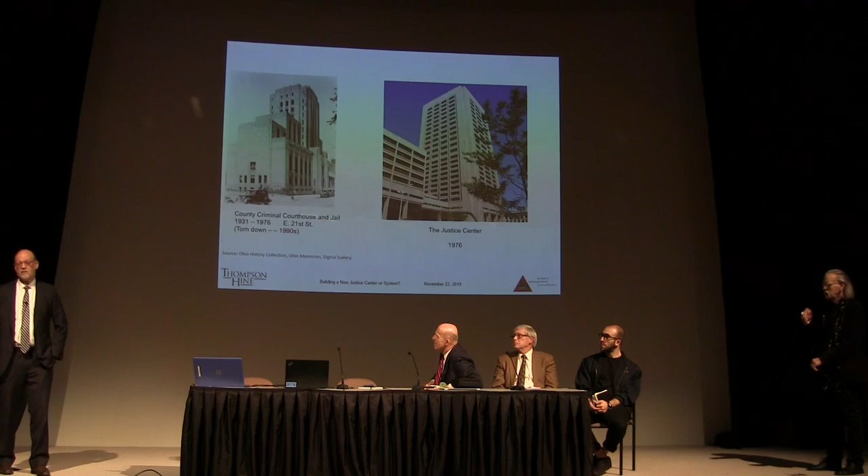But what happened over on the left was in 1931, the county criminal courthouse and jail was erected. That actually served until 1976, when the new Justice Center, or now the old new Justice Center, came into being. That was actually torn down in the 1990s. It was out there for quite a while on East 21st Street. If you look at the building, it's kind of a classic Art Deco building, resembling in some ways the Justice Center with the tower and what's to the left of it. But the Justice Center was completed in 1976.

Now, the Justice Center, just a little bit of information about it. It's 25 stories high, 420 feet. It has 44 courtrooms and 9 hearing rooms shared by the Common Pleas Court and the Cleveland Municipal Court, and has the Police Administration Building attached to it. And obviously, in back of it, when it was first erected, Jail 1. Jail 1, depending on how and when you looked at it, accommodated approximately 956 beds.

Now, this is kind of interesting. If you go back to the history of this, in 1972, the budget was $62 million. It was completed in 1976 for $179 million. I've been asked if I manage this project not to do that again. But I will tell you that there's some justification for a little of that. The scope did change when the city and county got involved. There were some additions, the police administration building and some other things. But there were also very difficult issues with procurement that led to a lot of criticism, a lot of cost overruns.

It is interesting because at or about the same time, the Sears Tower was completed. Actually, two and a half years before that, the Sears Tower was also completed for $179 million. The Sears Tower is three times taller, and its volume is over 4 million square feet compared to under 2 million square feet for this. It was also sold three years ago for $1.3 billion. If we could find someone to buy the Justice Center for $1.3 billion, I would have many solutions for us.

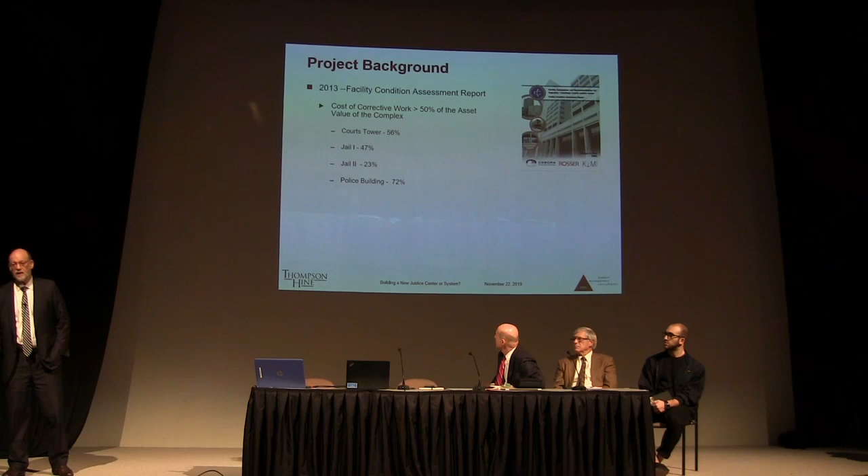2014 did a planning report just talking about how we would go about renovating it and what we would do. And basically what it showed was, depending on what you did, just to fix the buildings without changing anything programmatically would be between $300 million and $428 million.

To say it a different way, if this building had been maintained from day one, if the roof system, the wall system, the mechanical systems, if everything had been updated and maintained properly, that expenditure would not have been required, because everything would have been in real time brought up to speed. So that's just a cost, not to actually do anything programmatically to make the buildings better, just to make them work. At that time, a cost of a new building was unknown because that was not part of the exploration.

Now, one more thing I will tell you. The planning report also said that if you think about what to do in the future, there was some planning, and it said, what would we have to plan for if we actually built new facilities? And this was an assumption. It was really interesting in the 2014 report.

It said, look on the right-hand side, because at that point in time, our jail population had steadily gone up. Keep in mind, and this is something our team has uncovered, in the last 10 years, the population of Cuyahoga County, as we know, has gone down. We hope it's stabilized, but over the last 10 or 15 years, it's gone down. The crime rate has gone down.

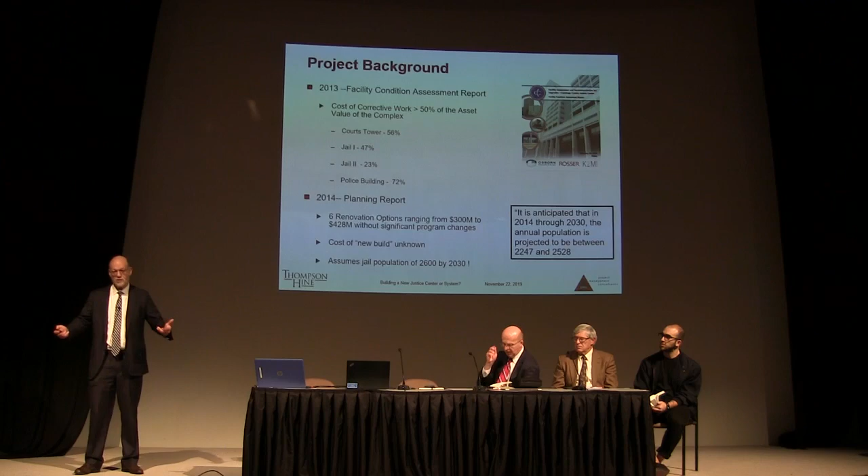Now, you've read a lot about the issues and what's going on with that, and we still are detaining someplace in the county about 1,900, it varies. It's a little down on the holidays. We put them in different places now, not necessarily in jail 1 or jail 2, but we have to accommodate all of them. So in any event, that was the assumption, that we would have to have a jail that housed 2,600 people based on the trends and based on that planning.

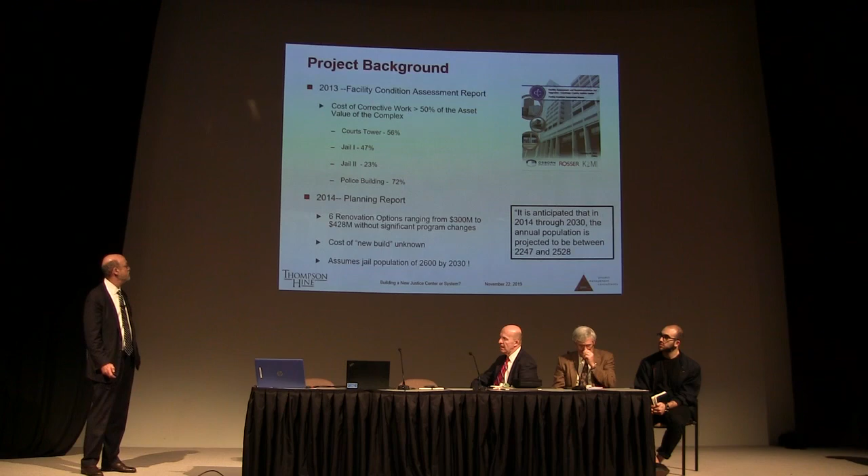Now, I'll mention one more thing. Every year something wasn't done, the cost of what you would eventually do increases. The construction cost, renovation cost, generally is about double the CPI. It leads inflation. It's a leading indicator, unfortunately.

Right now, we are not quite as hot, but there are very hot markets all around us. Building in Columbus right now, very high costs. In this industry, in the justice industry, we have some very high costs.

Hollow metal, for example, there are very few providers, very high cost. Our estimate, and what has been happening, is that really these costs are going up by about 6% a year.

Let's just take that cost of what it would take to fix things, and let's use the number of $500 million because it's easy to calculate. If the cost goes up 6% a year, every year you wait to do something, it's going up $30 million.

That's not the biggest cost that's going up. We're going to show you the biggest cost that's going up because of inaction in a few minutes. So in any event, now I'm skipping a whole lot of stuff.

I'm not going to talk to you about all the issues about what happened since that study. As you may know, what happened ultimately is a steering committee was formed. There are 12 people that make decisions on this committee. It has been meeting. They must make decisions by a 10 of 12 vote. They're all public officials with a fiduciary responsibility as to what occurs.

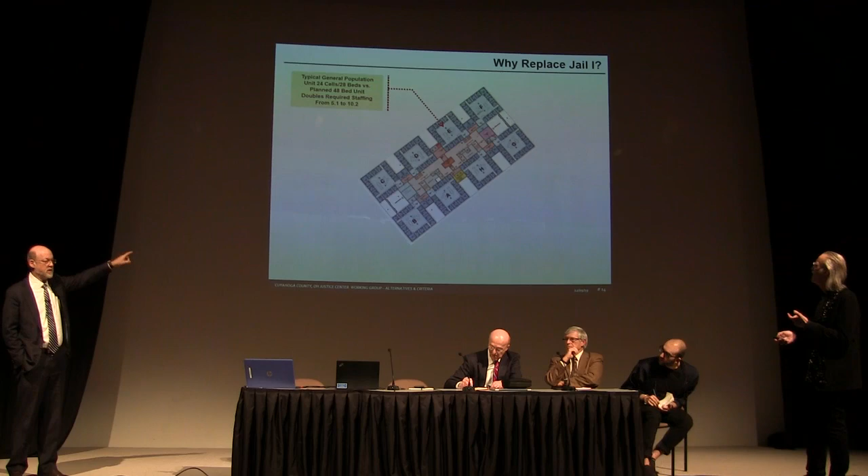Jail 1 was designed with housing units of about 24 cells, so 24 offenders per unit. It can't be double celled because of the cell sizes and other standards. There have been a couple of program rooms—a counseling room, an interview room, and a classroom—that have been converted to multi-bed rooms, so now there's about 26 to 28 offenders in each unit. Under Ohio standards, general population units can be as large as 48 beds.

So what we're operating in already, and will continue to operate in, is what's called direct supervision. We have a staff member in the housing unit dealing with that population 24 hours a day, 7 days a week. Each one of these housing units requires 5.1 staff just to operate the housing 24/7—that's three shifts, 7 days a week, with vacation, with relief, with weekends. That's what the equation ends up being. And keep in mind, if you look at the building from the outside, that's what you're seeing—that's the structure. That can't be changed; that's the way the building is built.

So effectively, 2 of these units could be staffed by the same 5 people. So effectively, this floor plate doubles the housing staffing of what it could be.

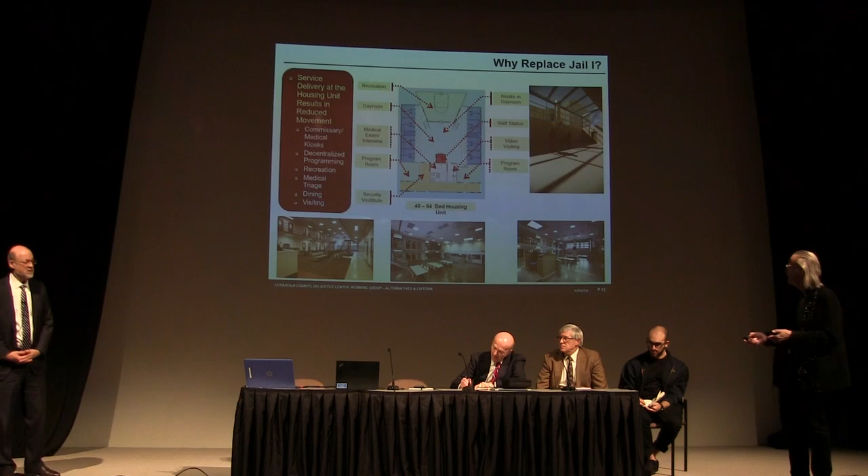So keep in mind, just to emphasize this—whenever you move someone, someone still has to stay there to supervise the housing unit. So now we have someone going with whoever they have to go with. They're traveling all over. You have that going on.

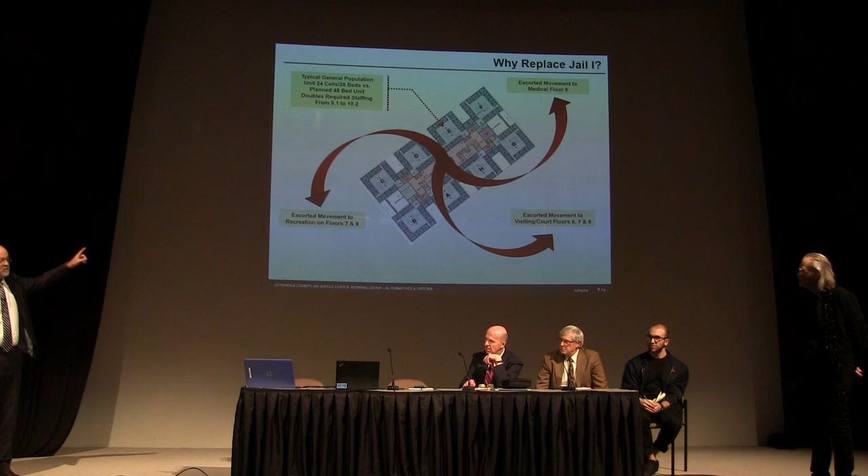And by the way, we call it direct supervision, but if you've ever actually looked in those housing units, it's not direct supervision of the personnel, it's direct supervision of doors. You really can't see very well much of what's going on, and the space is very poor space.

We're going to show you now what a modern, efficient jail looks like with much better housing.

Before we get to that, all this ends up talking about operational savings, but the bigger issue here is one of human capital and access to programs, access to outdoors, feeling the sun on your body. And it's not just the human capital of the offender—staff live here 8 hours a day, and they serve a life sentence.

Remember, most folks in the county jail are there maybe a year or so, or a few months. Maybe there's some cases that run longer, but it's a relatively short duration, whereas the staff serve a life sentence, 8 hours a day. And it does affect wellness, it does affect your outlook, it does affect how well you can do your job, which also affects safety and security—as does seeing movement.

So this is what the program's based on. This would be a 48-bed housing unit, but in that house, every housing unit has a recreation area.

And effectively, rather than moving people and saying you get recreation from 10 o'clock to 11 o'clock, with behaviors—well, I simply unlock that door and now the offenders have a choice of being in a day room, their cell, or outdoors. It helps reduce the apparent density and the people getting in each other's face.

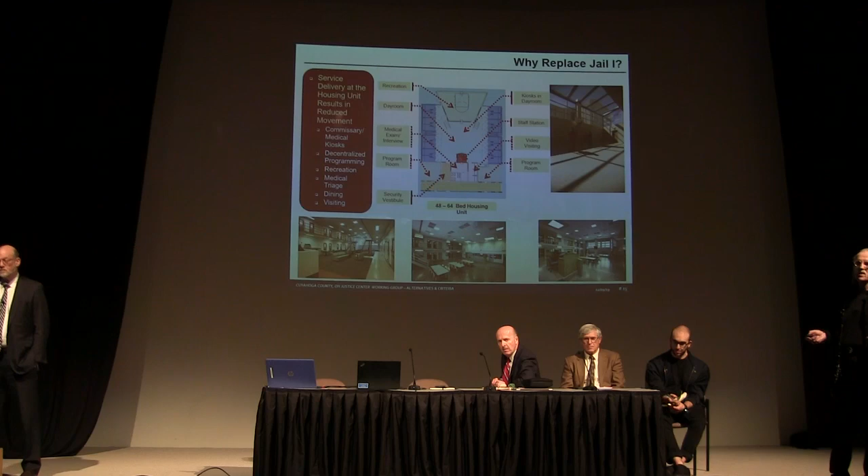Every housing unit would have a small medical exam room. So rather than move everybody for sick call—and quite frankly, when you do sick call centrally, everybody wants to go because they get to get out of their housing unit for an hour.

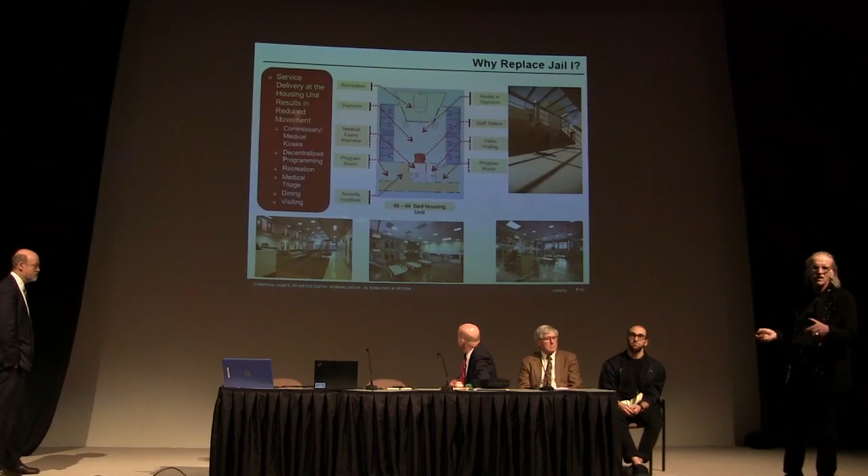The nurse would now come here for initial sick call, and if it's simply an aspirin or something that can be taken care of, it would be handled there without moving the offender. If it's something requiring more treatment, they would then be moved to central medical.

It comes with program rooms so that we can deliver programs right at the housing unit. And it comes with a video visiting area, which includes both general video visiting as well as a private room that can be connected into by the public defender or by the bar. Typically that's put on a separate system so that there's no recording of it.

So basically we really only move somebody if they need serious medical treatment. We also have medical and mental health beds programmed in. So if it's a serious case, they're not going to be in a general population housing unit. They're really only moved if they're going to go to court or they're going to be released.

Everything else is delivered, which means the one staff member I've assigned to this housing each shift is really responsible for the whole range of activities.

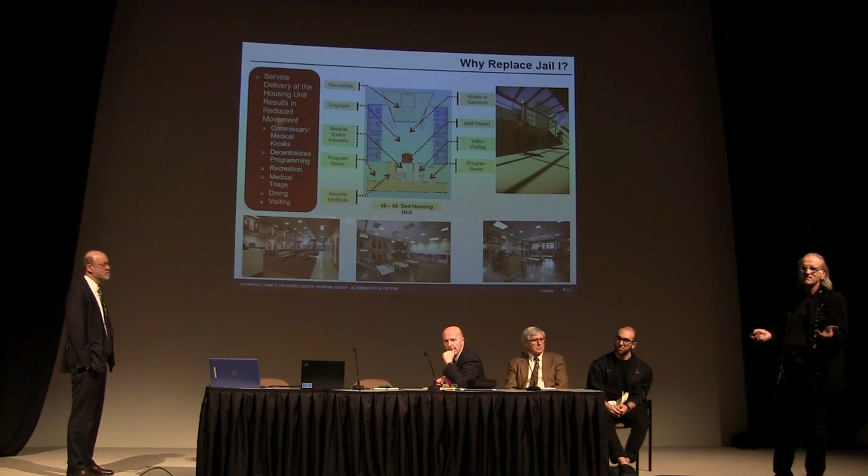And again, you can get an idea of the quality of environment, the access to an outdoor area. You can get more recreation, get more physical activity. Probably the worst thing in jails that affects behavior, that affects incidents, and unfortunately affects suicides, is lack of anything to do—just sitting there day after day after day.

So we took a quick look at what that meant. Right now, Jail 1 and Jail 2 have 66 housing units in total, just general population and special. The program calls for 41. And so this is just housing staff. This doesn't include the movement staff or separate staff for recreation or for visiting if you do in fact get to see your client.

Just at face value of the program, based on housing only, which is a pretty straightforward equation, it saves 127.5 positions in the day-to-day operation of the jail. I didn't know what to do exactly with this because we have done calculations and haven't yet released all of this information. But I will tell you in some form exactly what these savings are, just not on this slide.

Go on, it's significant. Now, the other thing in both of these jails, when they were built, direct supervision was new, something people were adopting. In most cases, people put in a floor control room to back up the staff assigned to the housing unit. We don't do that anymore because it's been proven to work on an interpersonal relationship basis. Correctional officers would have body alarms in case of an emergency. I've actually been in jails when a body alarm gets pushed, and it's amazing the response you get from the team coming to the officer's aid. So the outer door of housing would be controlled by main control.

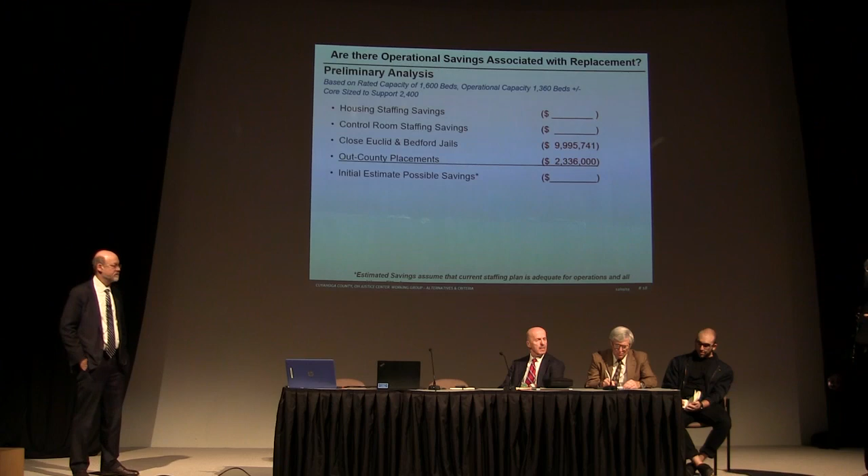And that's just through operation cost. And you follow through with the population management initiatives. Because it still means you drive that population down to that 1,600 number, which we think should not even be a challenge. Now, it should be done.

So let me just show you something else. Cost of a new jail of the type we're talking about - and we'll tell you more about what that would be like, an efficient jail - somewhere in the vicinity of $300 to $400 million. High number, but that's what it costs to do this properly, exclusive of land cost. You can make some assumptions as to what you would have to do to pay for that.

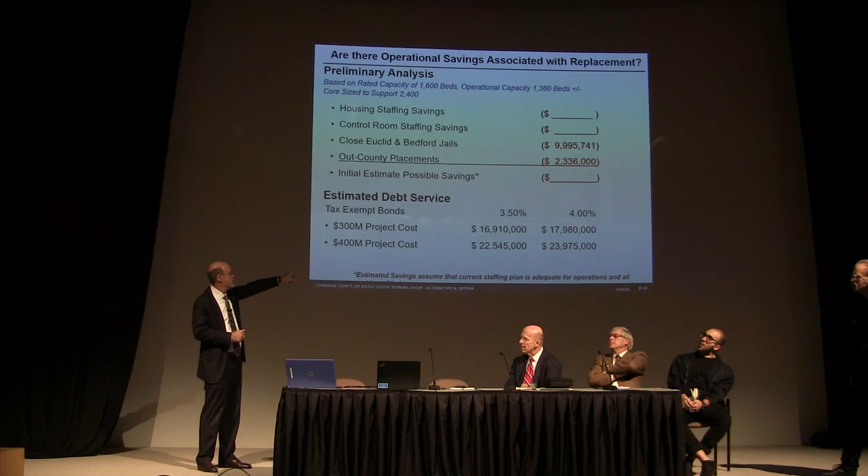AA tax-exempt bonds—I've just done an example here. Right now, interest rates are somewhere between 3.5% and 4% if you issued them. Including issuance cost, the debt service would be somewhere from $17 million at 3.5% to $24 million at 4% on $400 million. So the range would be $17 million to $24 million, with the higher interest rate matching the higher project cost. That's not even counting the savings we're talking about from efficiency—$27 million a year would be realized.

It would easily pay for the actual cost of that facility, particularly over 30 years. If you were 2 or 3 million ahead a year over 30 years, you'd actually have money left over for other things. The idea of what you could gain by having an efficient, proper jail without all this unnecessary and counterproductive movement is pretty extraordinary. Effectively, the savings in the jail would pay for over 50% of the cost of the entire project: courts, office space, and jail.

So that's kind of the background on that. We validated this with rules of thumb and other larger facilities that have staffing plans. We think the savings is realistic. Obviously, this was one of the questions we got from county council and the county executive as we prepared to look at alternatives, to make sure it was doable.

Some of the other common elements: the sheriff's admin would go with the jail. Everything that's off-site now would be consolidated as part of the courthouse complex—public defender's offices, probation offices, other things that are in other space. There's a lot of stuff in Courthouse Square that would come back to the site. Parking is included in the analysis so that we don't have people parking down by the river and walking up the bank to work at the courthouse. No matter what the site or the plan, we incorporate a parking component.

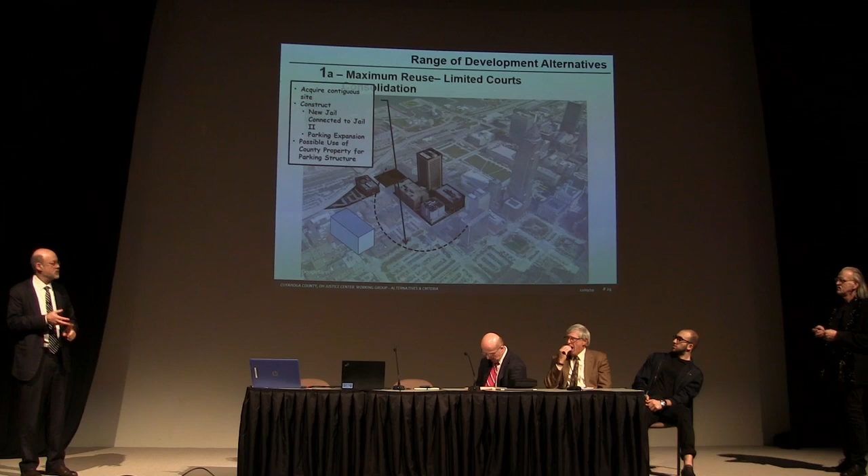The volume of whatever you put there—that box represents the volume. So that box, in some configuration, has to fit next to jail 2 in order to do this, because it's just impossible to use jail 1. So if we want to keep the jail on the site, you have two options. One is to put that box somewhere.

Since jail 1 is the piece that will be replaced in any option, it's obviously the first piece to be built because we get it out of the way.

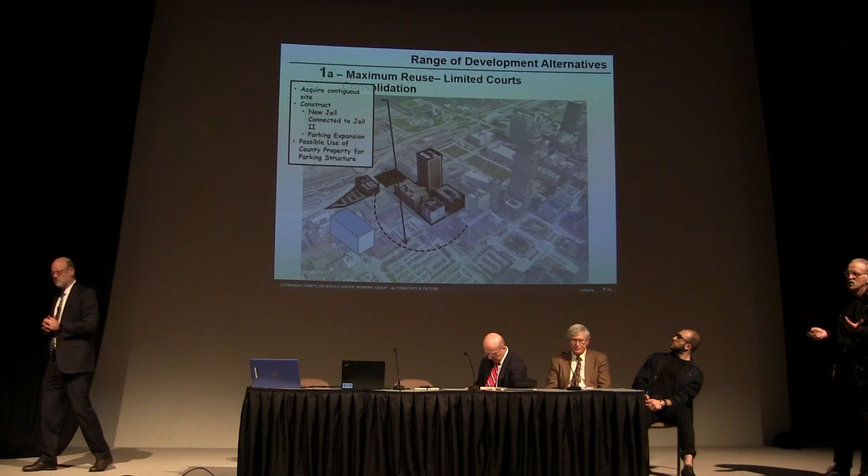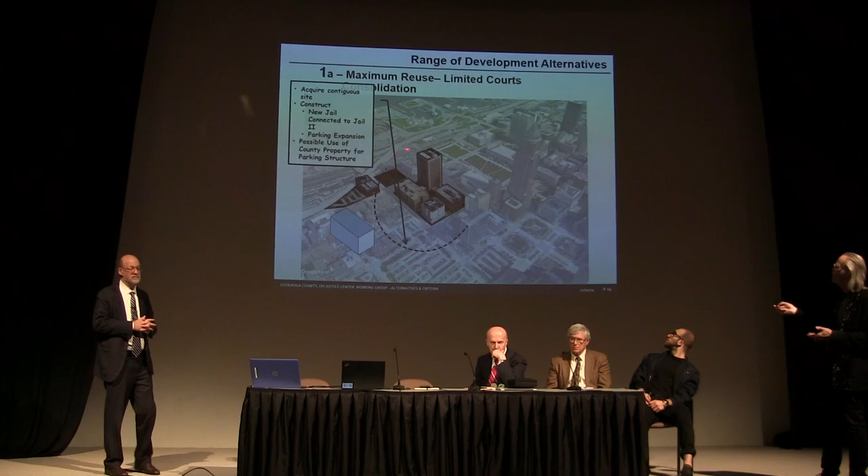The reason the park and the courthouse square site is shown is we'd either have to acquire additional land for parking, or potentially under the park do what we've done behind the old courthouse with underground parking, because we're trying to make sure every scheme has some kind of a solution for parking long term.

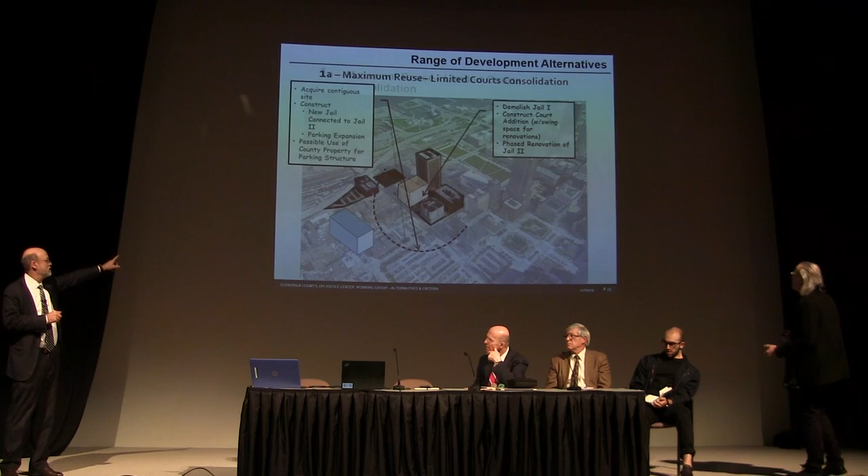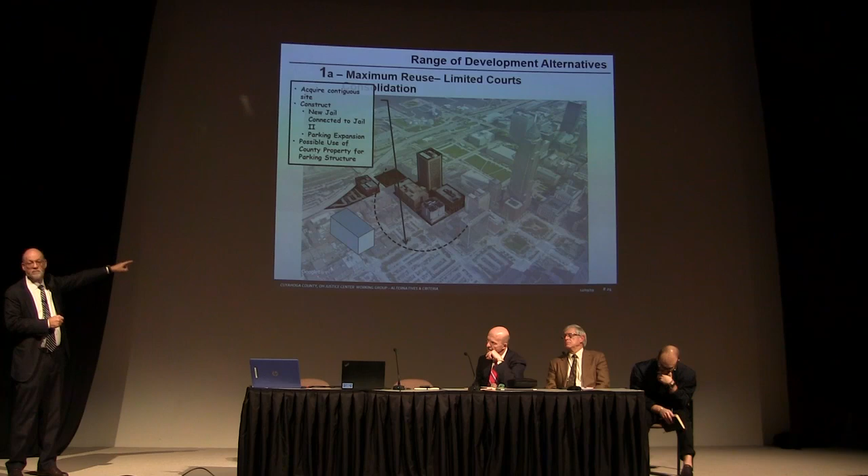Now let me make another couple statements about this box. Jails are extremely heavy buildings, as you can imagine, with the concrete, the steel, et cetera. Any box like this that you put on this site, because it's an urban site with not a lot of space, it's going to be a vertical jail, many stories tall. That means the following things.

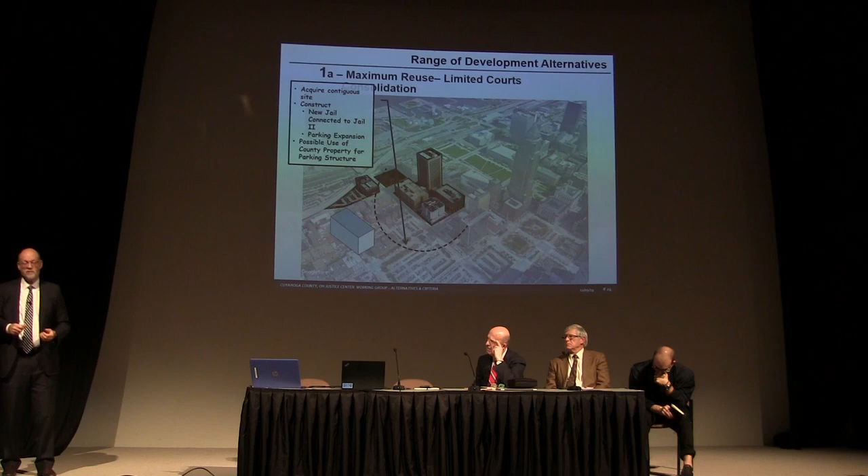Number one, from a construction point of view, it's got to be on deep caissons. We have glacial till downtown, and we have 200 feet to bedrock. It's very expensive construction to put in caissons and put a jail on that kind of building. So any vertical jail is going to be 15 to 20% more expensive than a horizontal jail that might go somewhere else. That's point number one. This also has elevators.

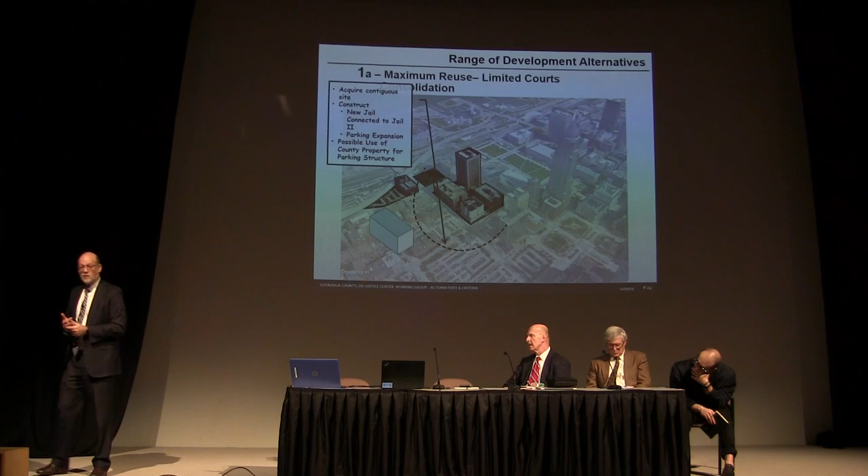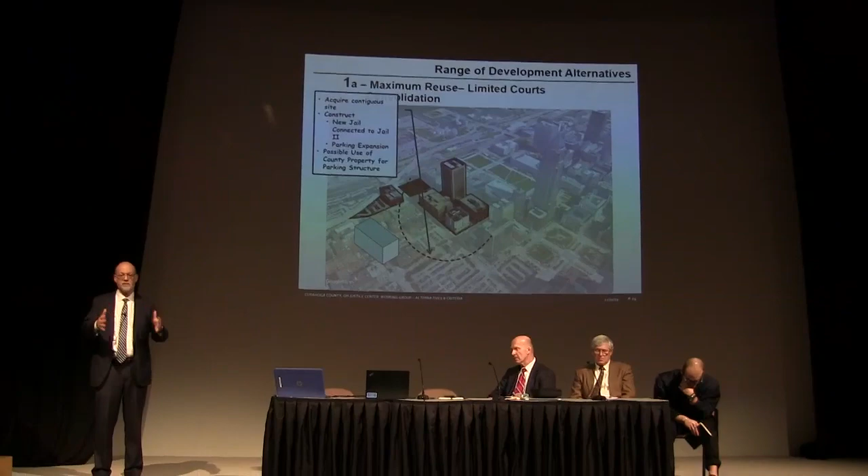The other thing you will hear if you talk to the warden, the sheriff, or the director, is that they are not fans of vertical jails because they don't like the vertical movement. They don't like the elevators. They think there's safety, security, and other issues. Obviously, the kind of jail housing unit we're talking about, which would have recreation with each unit, you can still do it, but it's challenging to do a vertical jail.

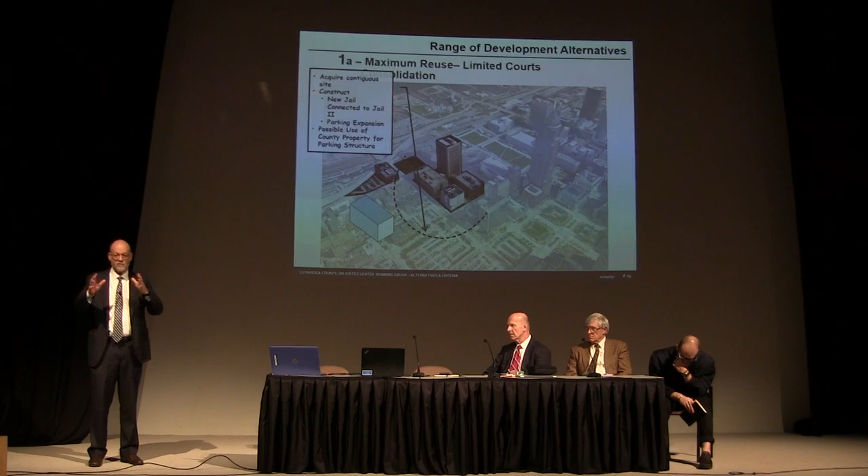The most important thing to think about here is what we talked about when you see another alternative, which is a campus jail. It has a central unit, and then you can put housing units around it, and you can have as many or as few as you want. So you could start out with less, and if you found you needed more, you could expand.

The issue with a vertical jail is you build it one time, and you build it for the maximum of what you think it has to hold. So unlike building a central core that could have 2,400 but only build out for the 1,600 housing units you want, for this kind of building you have to build a core and shell capable of holding all 2,400, even if you never use it, because otherwise if you ever did need the expansion, you'd have no place to expand. By the way, if you don't use that space, there's no adaptive reuse for a jail. It's simply wasted.

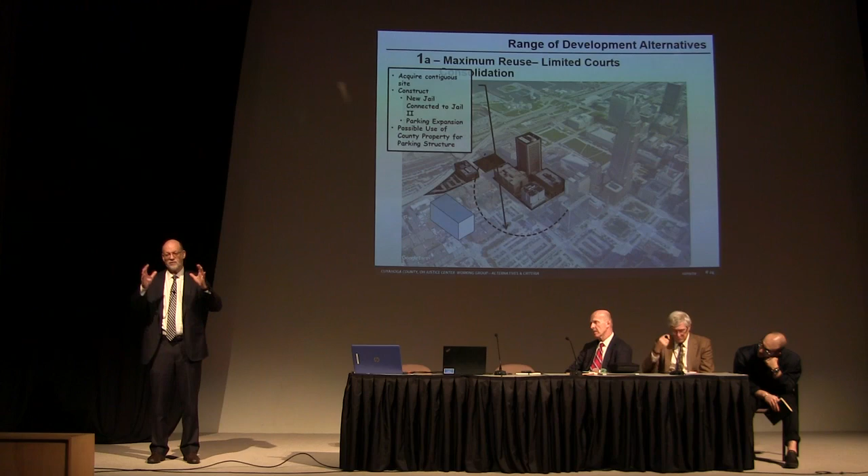As we talk about this, we'll be throwing out some of those things, but once alternatives are selected, every one of those issues will be quantified for comparison for the 3 to 5 alternatives we narrow it down to.

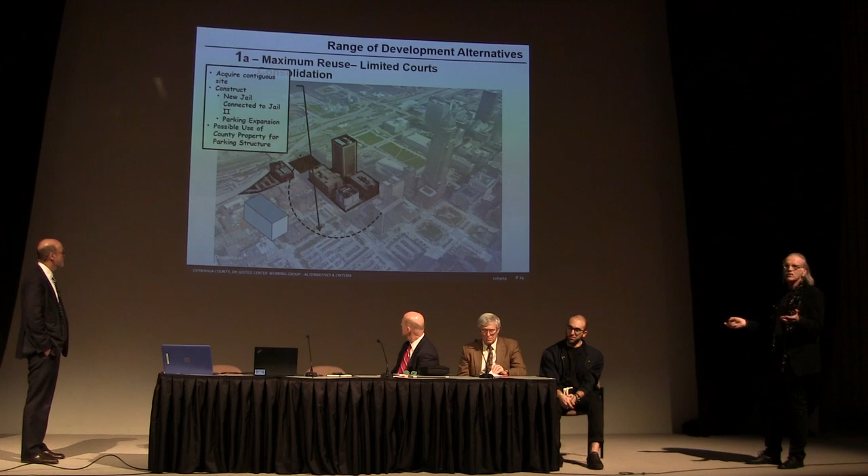A related issue, in terms of starting this project, is that the jail takes 4 to 5 years before we touch anything else, until we build the jail and demolish jail 1.

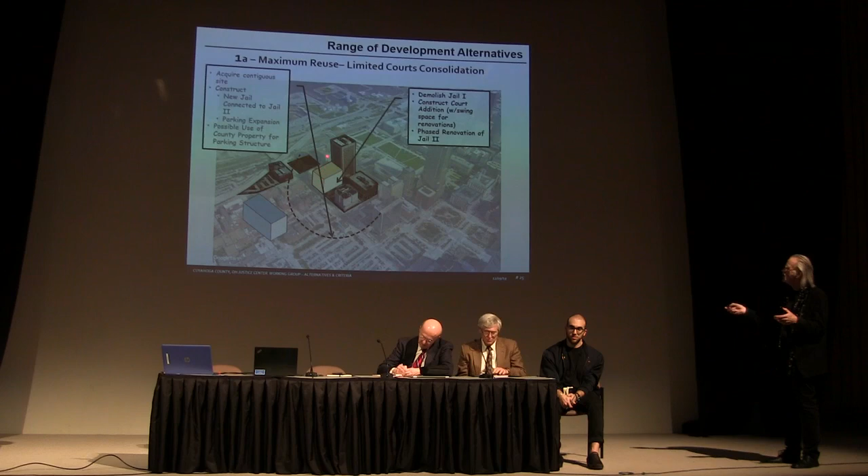After we demolish jail 1, we would construct our courts addition for the shortfall in space we talked about. But in this case, the shortfall goes down a bit because domestic relations would stay in the old courthouse. This was, again, about using everything we've got.

Then the final phases would be renovation of all the existing buildings once we had some swing space to move people around. And again, we would not have enough swing space to fully vacate the courts tower, so that renovation would have to be done 2 to 3 or 4 floors at a time as we go through it.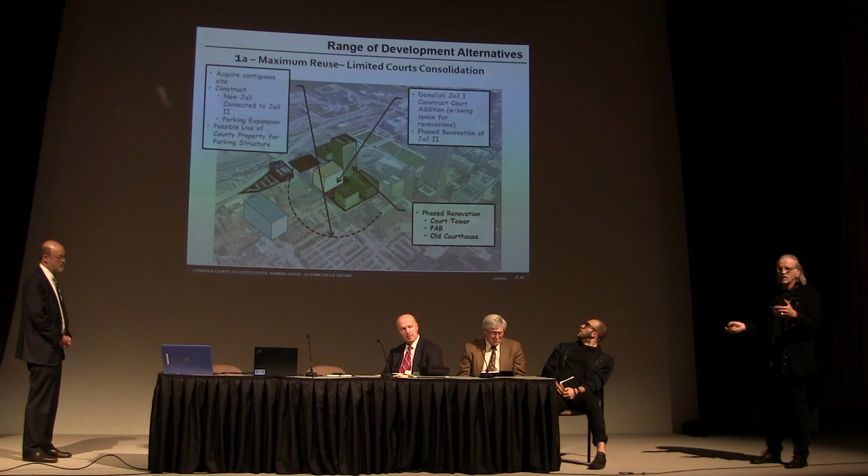I think it's important, when we look at that courthouse and where we are today in terms of how you all practice versus where they were when they built that courthouse, to recognize we'd basically be doing a major renovation of everything in that courthouse functionally.

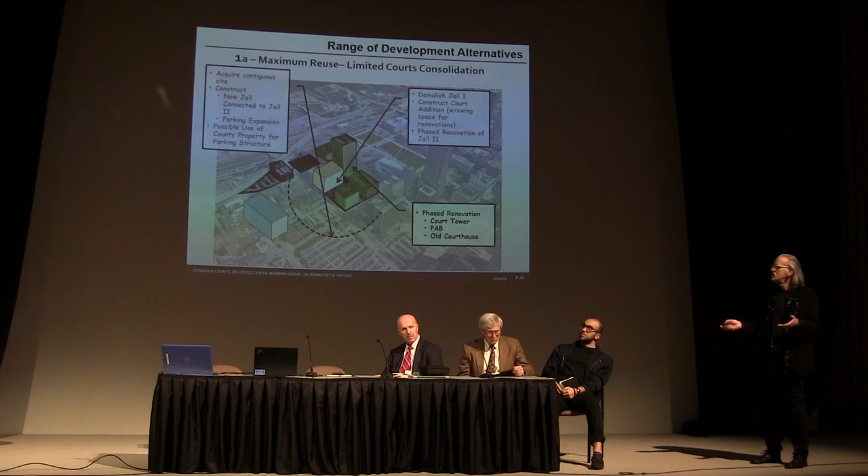So we do have advantages and disadvantages, and this will be on the website. Jeff's talked on some of these. Obviously, we gain the advantage of getting out of Jail 1 and getting operational savings from it. We maintain a consolidated justice center on the existing site, which has been a concern.

But there's a wide range of major disadvantages, and probably a couple of the biggest are programmatic compromises, because whatever we would do with the courtrooms is based upon the module we have in the tower, and domestic relations staying in the historic courthouse. We also believe...

We're going to speed this up. Andy, we have more of a time restriction than I thought. We're going to have to zoom through the rest of this and get to the polling, so we're going to go really fast through these.

All the on-site units probably have the highest comparative cost and the longest time to complete occupancy of the project.

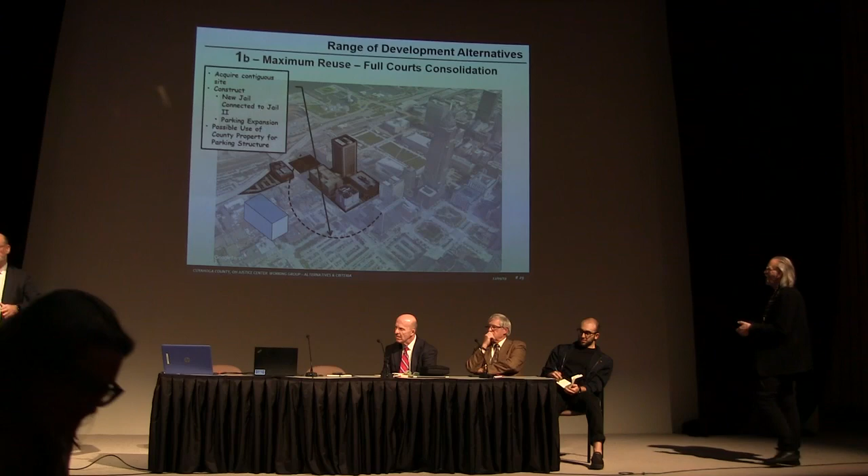So keep in mind, if you do this, once again, you can't do anything until you build the new Jail 1, then you get rid of the old Jail 1, and then at that point in time, you can renovate or put your next unit there.

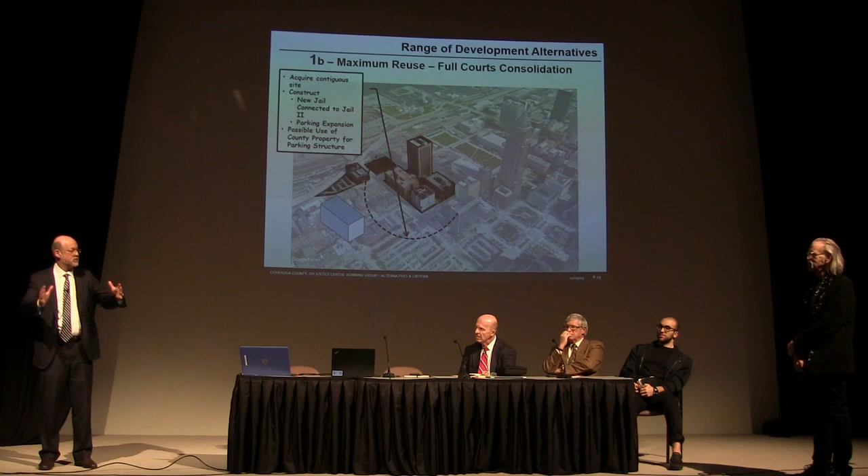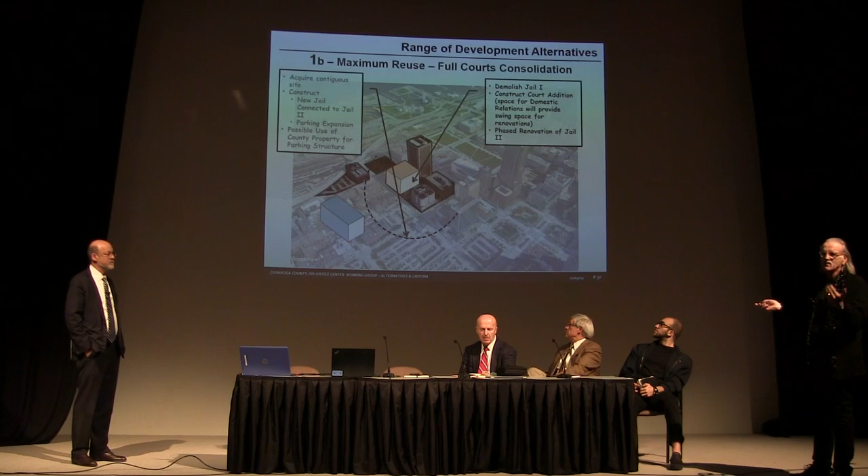So the second option is very similar. The biggest difference is the addition's large enough to allow us to bring domestic relations on site, which gets out of the safety and security issues we have, but many of the other advantages and disadvantages are the same.

These are the highest cost options because number one, the vertical jail is the highest cost option for a jail. Number two, renovation is more expensive than building new, and it takes so long because you can't start the courthouse until you get done with the jails.

If the jail takes 4 to 5 years, you don't even start the courthouse or whatever you're going to do until you're 5 years out, and it extends the whole project maybe 8 to 10 years. The longer the duration of the project, the more expensive it is because you're keeping people out there, and you also have escalation.

And then I'll just run through these quickly. 1C says we're not going to buy new land, we're going to keep everything on site, because we were asked that question too. Basically, the only element that could be taken down, still allowing the jail and the courts to function, would be the old police administration building.

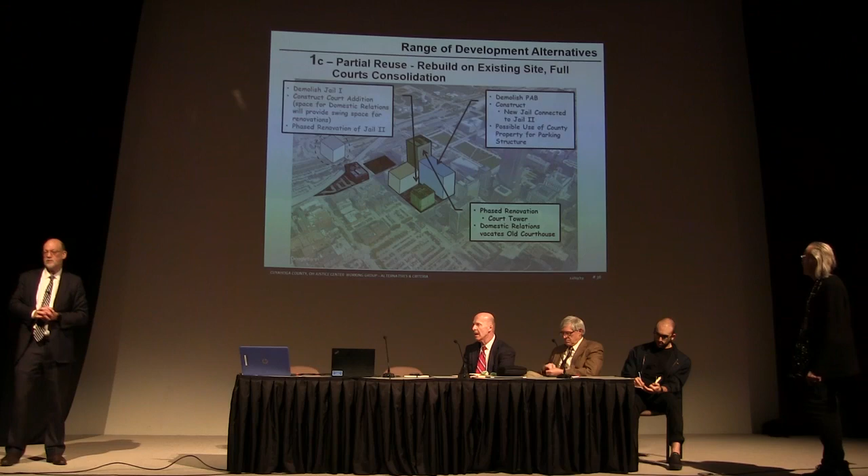So that becomes the jail site. About a 16 to 18 story jail on Ontario connected to Jail 2. Then we tear down Jail 1, expand the courts, and then we renovate the courts tower. So once again, a 16 to 18 story jail on Ontario, which some people would have an issue with.

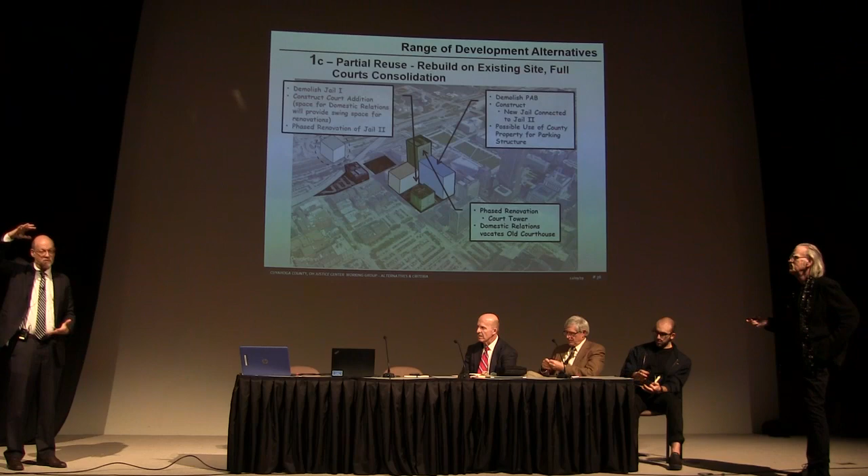But also, by the way, 16 to 18 stories takes out your view plane from the courts, but also now you have a massively tall vertical jail, very expensive, with movement issues and other problems. And you have to build it that big, with no flexibility. Yeah, and again, we have high cost and long time to occupancy.

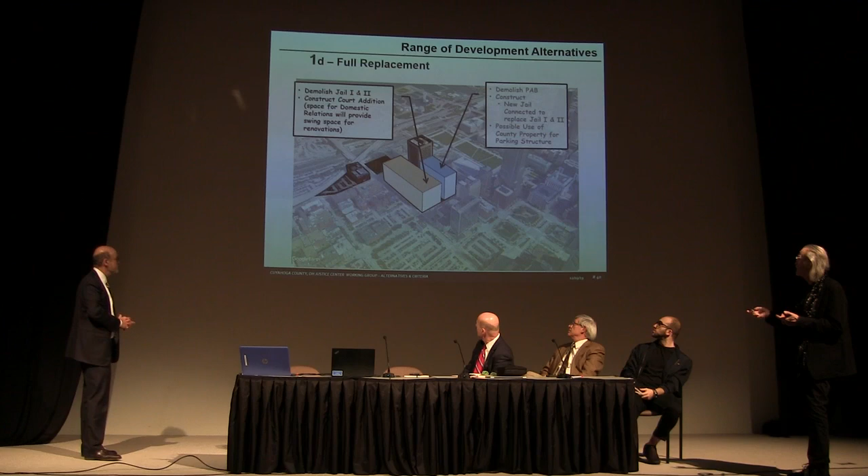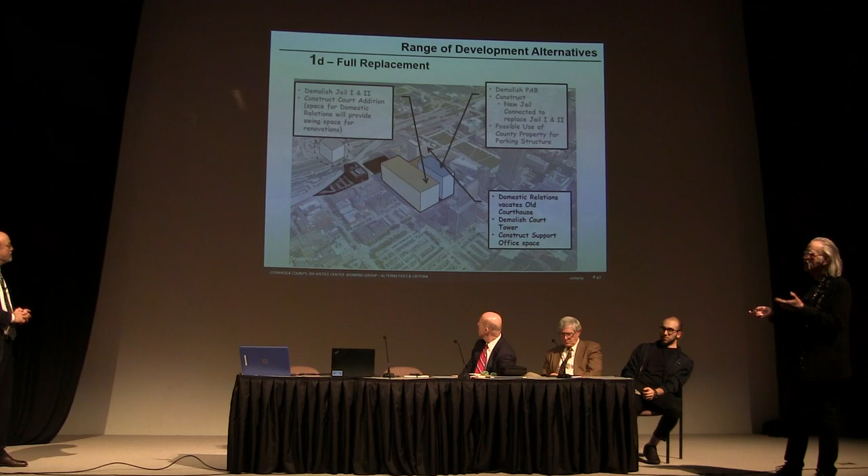We've talked about 8 courtrooms per floor instead of 4 in terms of efficiencies and other things that could be gained. And then we would remove the jail tower and have our front door lobby still off of Ontario.

Once again, you can't start that process until you get done with all of the jails and everything else. A new courthouse may be more efficient, and it would be on the same site. You'd be 5 years out before you'd even start to think about how to do that, or actually do it.

There's a couple other disadvantages we didn't talk about, but the judges actually rated very highly as a concern: disruption during construction. And just as a comment, when we demolish anything on this site, we're not just demolishing that building.

We're demolishing 2 levels below grade where the parking is, because we have to start with new foundations for the new building. So it's a fairly major demolition and reconstruction process and project.

So the next option is if we relocate the jail and then either renovate or rebuild the courthouse on the existing site. A couple examples: Philadelphia built a new criminal justice center, which I was fortunate enough to design, so I'm very proud of it. And at the time, they were going to put a pretrial jail behind the courthouse.

The decision was made not to do that because of how many beds they could put there versus a site further out of town, about 20 minutes away. They move 600 inmates a day to the courthouse.

They all go into a central holding in the basement, and they're all there by 8 o'clock in the morning. We talked to the judges about doing a morning call and an afternoon call so we could move twice, but their culture is, no, we want everybody here in the morning. So everybody's there in the morning.

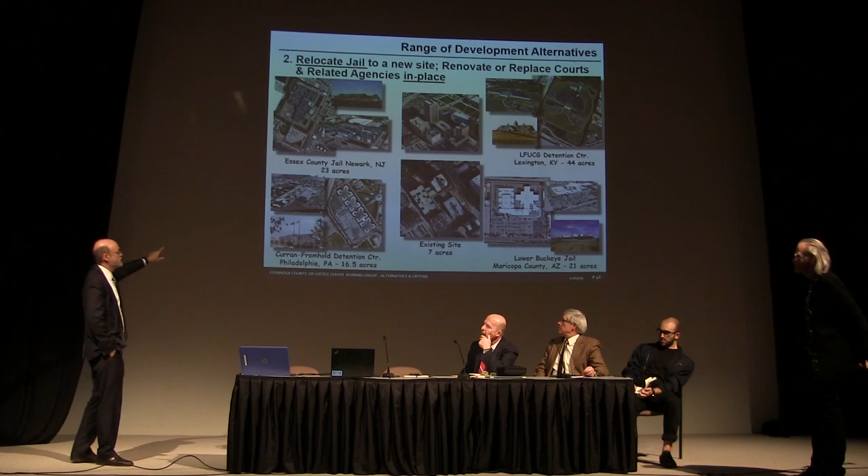We were at... I'm gonna cut this one a little short for time. Go to the next slide, the transportation slide. I just want to tell you this.

We did an extensive study of the cost of transportation. If we did it like other places do, with transport buses, overland buses built for this, the concept is that the corrections officers would do it. They would do the transportation from the facility in the morning and take them back during the day as the population is ready for it. These are not school buses; these are expensive, good buses made for this. Those corrections officers, when they have other tasks, perform them in between.

We did a study of what the cost would be to do a full transportation plan, and the answer is it's about $812,000 annually, which is a lot.

An important issue here, which comes up in all of our discussions with the judges and many bar members, is: yeah, but what if the body's not there? Because we're having trouble getting them even when the jail's right beside the courthouse.

One of the things we recommended, and the sheriff has concurred with, as well as jail administration, is that corrections will have responsibility. So they'll get the court list, they'll get the people downstairs to transport from holding into jail. They'll put them on the buses, and they'll have them here by 8 o'clock in the morning.

Rather than having, right now, a lot of transport split between the sheriff's independent law enforcement transportation unit and the jail, this gives us single responsibility and people that are used to dealing with groups of inmates, reflecting what's trying to be created: a culture of care rather than a culture of custody in terms of how people deal with each other.

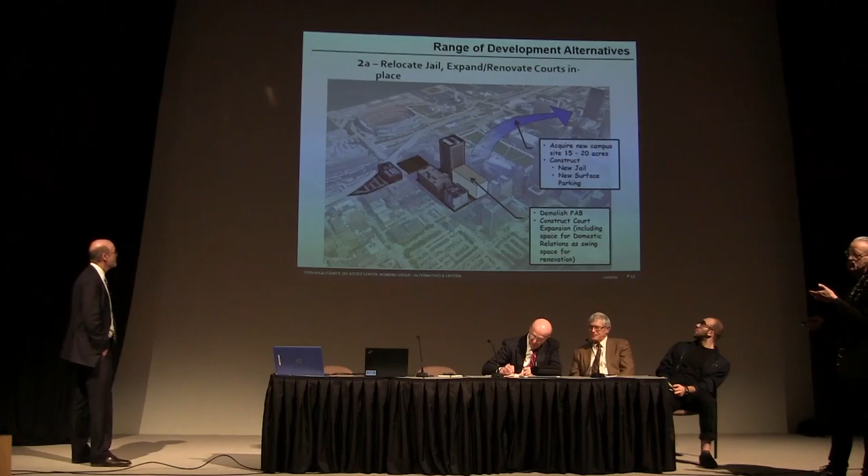Concurrently, we tear down the police administration building and start our courts expansion. When the jail's complete, we complete our expansion and renovate the tower. This is probably in the mid-range of cost and mid-range of time, because we can at least start concurrently with the jail.

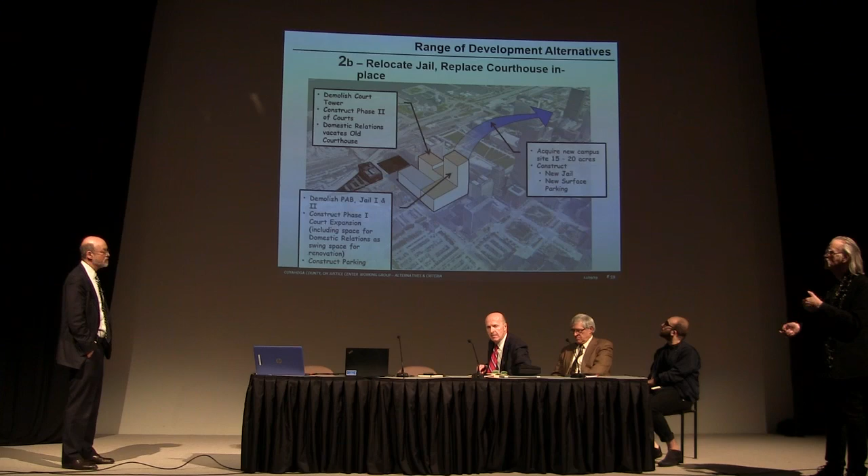Then the other choice is to replace in place. Here we'd suggest you build the jail first, then demolish all the jails and the PAB, because you have more design flexibility in how the building goes together and how it works, and then you tear down the tower. But basically you'd end up with a new jail on a site remote from the courthouse, and a new courthouse on the existing site. So at the end of the day, you do have a new jail, and you do have a new courthouse, with the new courthouse on the existing site.

But once again, you can't start the new courthouse until you've completely completed your new jail, moved everybody out of the jail, and demolished those buildings. So it's still an 8 to 10 year process.

So these are both mid-range options. Now I'll do my Federal Express, one breath presentation for the rest, Jeff. All right, so new court jail facilities on a new site. It could be a new urban site, which would take 2 to 3 blocks, or a new site a bit further out from the core, or a new urban site for the courthouse with a new jail on a remote site.

Again, there have been facilities developed downtown, but in most cases, as Wayne County is doing now, they're moving it pretty far out of the downtown. Wayne County is actually building out beside the Ring Freeway rather than downtown where the jail and courthouse is now.

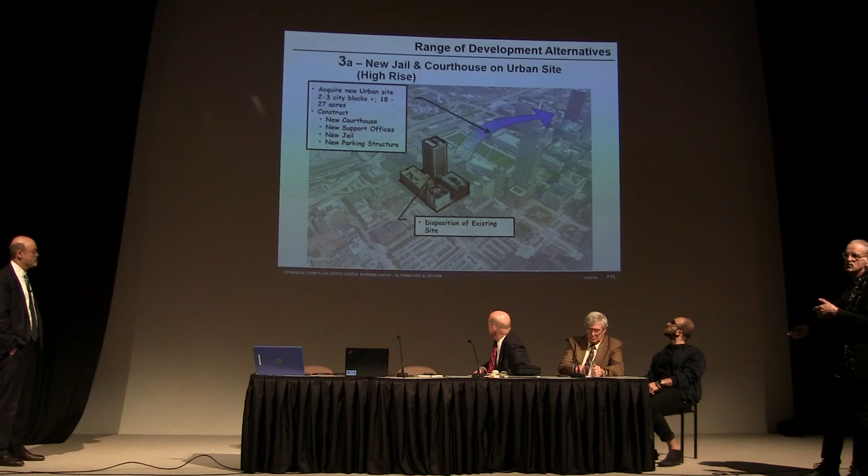So again, we acquire a new urban site of 2 to 3 blocks, build a consolidated justice center, and dispose of the existing site. This starts to bring our costs down because of all the escalation, extended schedule, and all the unknowns of renovation that we'd have to do in a reuse.

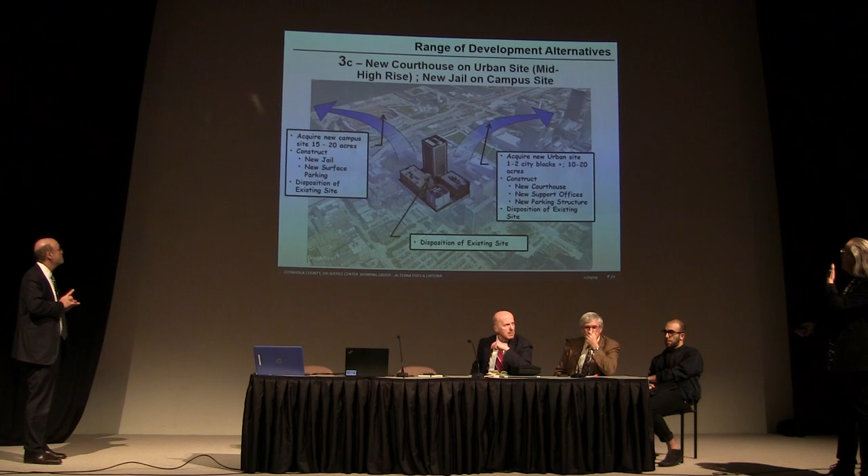So a new campus site for the jail, 1 to 2 city blocks for the courthouse, and then disposition of the existing site. That gives us pretty much where we're at, Jeff.

So the concepts here are having the jails—we spent a lot of time talking about jails on the site because we wanted you to understand the issues there. Having a low-rise, efficient jail complex takes about 15 acres to do that.

If you wanted to combine a new jail with a new low-rise courthouse connected, you're talking about 30 acres to do that. If you wanted a new jail with an urban downtown courthouse, but didn't want to wait on the current site, you'd find a new site close to downtown or very close to where you are now. That only takes, depending on what you're doing, maybe 5 or 6 acres.

Those sites could be found, and then you could start that immediately. Then eventually you demolish the site you have, and that's used for other purposes. I will make one comment right now about property, then we're going to poll.

This is something about property. We're not going to talk about specific property, what's out there or available or not. But we're going to talk about criteria, distance. The presumption is no matter what we do, there'll be access to public transportation, ample parking, and good highway access. That's a given—we wouldn't do anything that doesn't do that.